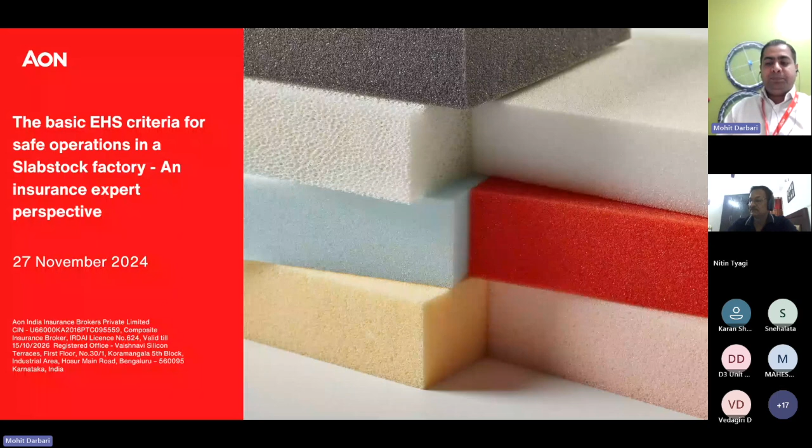So going to the next slide. The agenda of today's webinar would be about the introduction to the foam industry, then the risk analysis point of view, risk management, insurance perspective, and how you can transfer your risk to an insurance company. So the agenda would be briefly divided into 3 or 4 categories.

I would like to explain. First, we will be talking about the importance of risk assessment in the factory for hazard identification and risk mitigation. The second part is how we can transfer our risk to an insurance company by paying a considerable amount, known as a premium, so that our risk can be insured by an insurance company, and how this particular industry, the foam industry, is different from other industrial units working in your nearby region or areas. So this is the whole agenda today.

We will be only talking about fire insurance today because of the constraint of time. Insurance is a very vast subject, so today we will only be talking about industry insurance, or you can say fire insurance.

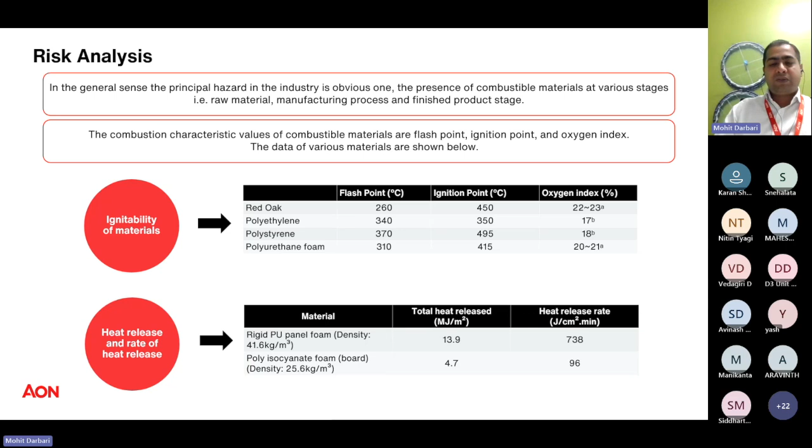Going forward, we have bifurcated the hazard into four categories. The first is storage of raw material, then the manufacturing process, then finished goods and other fire hazards. In any industries where I did inspections, I'm a risk engineer basically, we usually categorize the hazards into four categories, starting from raw material, then process hazards, then finished goods, and other fire hazards. Similarly, I have done it for the PU foam industry.

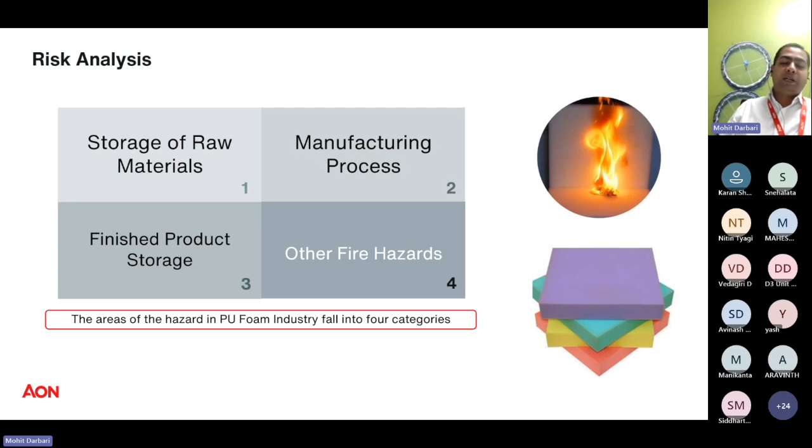And I think the participants who joined the webinar, basically from the mattress industry or seat manufacturers, sometimes use acetone for cleaning purposes, right? Acetone is highly flammable, with a flash point around -20 or -22 degrees Celsius. So these are the types of risks associated with raw material storage in our facility.

Now, the next slide: the specific hazards in the process. When we convert the raw material in the process, as I already discussed, the temperature can rise above 160 or 180 degrees during the foaming process, leading to self-ignition and posing a fire hazard. This is a very critical point in any PUF industry; you have to be very careful about the temperature. When the temperature rises above 160 degrees Celsius, there are more chances of self-ignition, or auto-ignition.

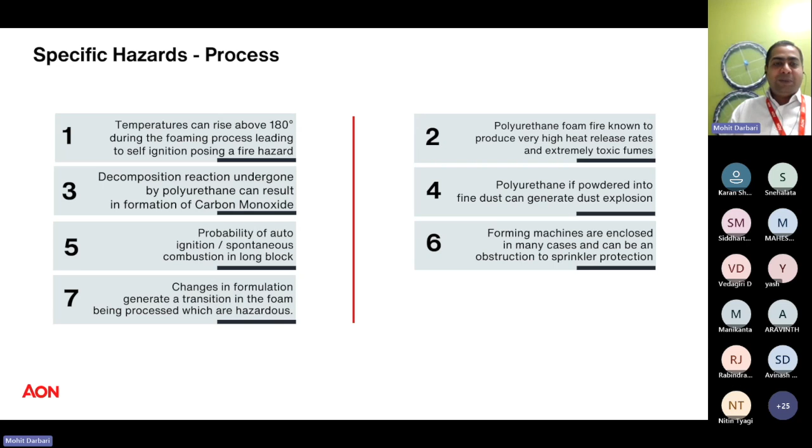Now going into the finished goods. Finished goods are usually in the form of long block, small block, PU foam seat or mattresses, etc. As we already discussed, there is a probability of auto ignition in the long block storage area, which is one of the risks. If we are not checking the temperature at each and every stage, then we may be creating risk. We are not minimizing the risk properly in that situation.

So for risk mitigation, measuring the temperature, especially in the long block storage area, is a critical factor. It is difficult to extinguish the fire if it happens. This is a very, very important point. In some industries, I have seen that if you install fire extinguishers and the fire hydrant system, the manual firefighting system, and a fire happens in those industries, you can use the fire extinguisher and douse the fire by going there.

But in this particular industry, it is very difficult to extinguish the fire because it is very difficult to identify the originating point of the fire at the very initial stage. If you are able to find the originating point, then it is okay. But if you cannot find the originating point after 1 or 2 minutes, from the smoldering side it can go in any direction. Ignition can happen rapidly. So it is difficult to extinguish the fire if it happens.

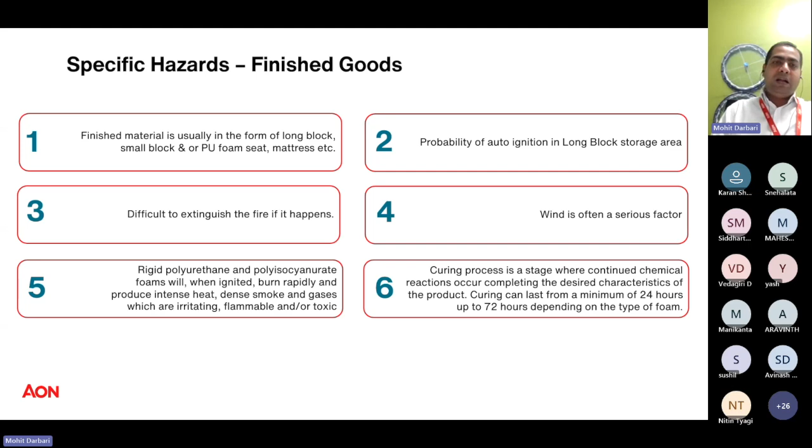have already discussed. So this is basically your commodity's inherent property. So whether it is your finished product, your process fire hazard or your raw material, it is the inherent property of the foam that these types of risks and hazards are present. Now, the next topic is how to mitigate those hazards, how to minimize those hazards. But before that, we will be talking about other hazards also.

Other hazards, in any industry, include unsafe electrical conditions. Especially in the PUF industries, you have to be very careful with your electrical condition. No naked, no bare wiring is allowed in any part of your factory, whether it is a process area, raw material storage area, finished goods area, scrap area, maintenance workshop, admin building, any area. No unsafe electrical condition should be there.

So it is always suggested from our side, from an insurance perspective, that all electrical installations should be industrial type. And wherever you have flammable solvent, flammable or combustible chemical storage, please go ahead with flame-proof electrical fittings. No non-industrial type, no domestic type switch should be allowed.

The second is hot work, cutting and welding. It is an important thing. If any operation needs to be done within the facility, within the production block, it is always suggested that you first isolate the storage area from the area of hot work so that no spark can go to your storage area or production area, which can convert into a fire.

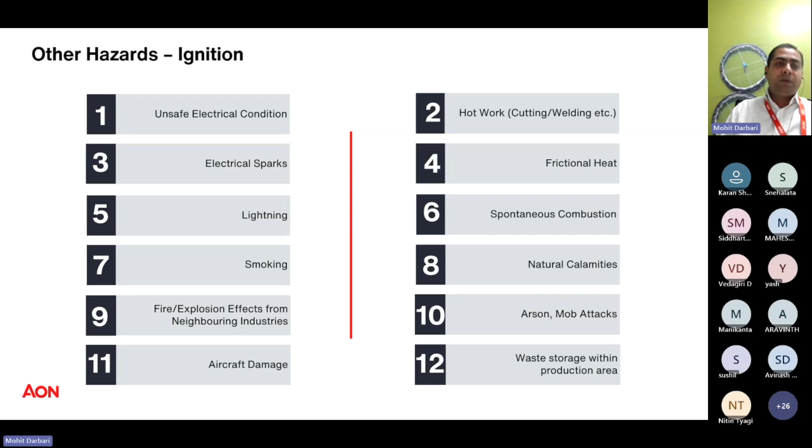So this is all we are talking about the other hazards. Now going to the risk management point of view, how we can control the risk: reduction and loss prevention methods, right? So the first is we can store the polyol and isocyanate in well-contained retention basin areas. So when I say retention basin areas, that means that if you are storing a tank, if you are having a metal tank, it should not be stored directly over the ground. Once you store directly over the ground, maybe some spillage or leakage you could not identify.

And if you have made the tanks or silos, then one dike should be provided so that in case of leakage, if it happens in those main tanks, it would be accumulated in that dike only. That chemical will not spill out from those areas. So these are some of the risk reduction measures pertaining to the storage of polyol and isocyanate.

Offloading of the truck into the tank should be organized in a way to remove any risk of human error. So when we are doing the connection of the pipe from the tanker to our tanks, we should be very careful so that polyol is connected to polyol and isocyanate is connected to isocyanate. And the same would be for the other chemicals also if you are using them in your industry. We should make some SOP for different color coding of the different pipelines for isocyanate and polyol, in the entire factory.

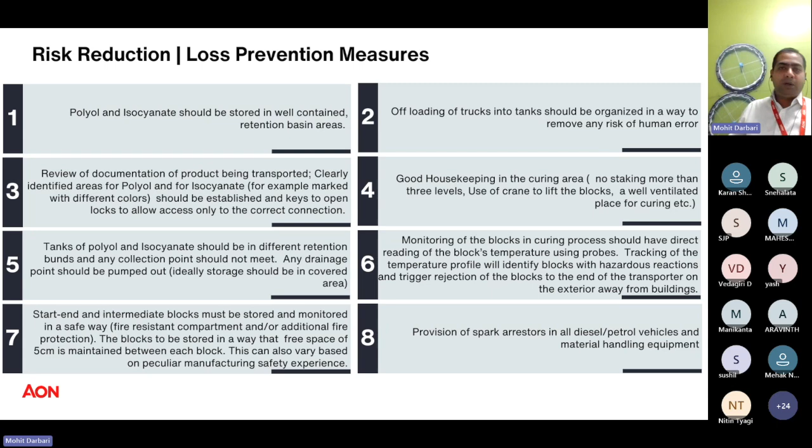So these are some of the risk reduction measures which I'm talking about here. There's a vast list. When we usually visit the factory, some practical things also come up. But these are some of the thumb rules, I would say, which should be applicable to all the foam manufacturers and the allied product industry.

The most important in this is basically the ESFR sprinkler. As we already discussed, manual firefighting in PUF industries is very difficult. So in case a fire happens in this type of factory, using fire extinguishers or the fire hydrant system is extremely challenging for dousing the fire. We have seen in our peer industries also that ESFR, early suppression fast response, sprinklers have great feasibility for dousing the fire. I have one video also that I'll be showing you at the end of the presentation. So that is the reason I have mentioned it here.

It is strongly recommended that all the areas where the foam is stored or handled be protected by the automatic sprinkler system. So what exactly does the sprinkler system give as an advantage to us?

First of all, in case of any fire happening in the facility, the first thing is that all human beings should be accumulated to the emergency assembly point, and you don't need to do any firefighting operation. The sprinkler would allow dousing the fire on its own. There is no manual intervention required.

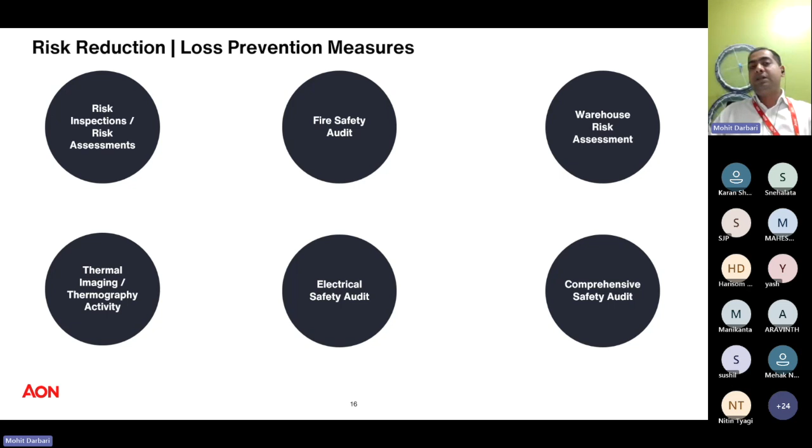Now, going ahead, the insurance perspective: what we understand right now is we identify the risk, we do the risk analysis. In the risk analysis, we find out that our industry is having more hazard as comparison to other industries. We did the risk analysis on the basis of four parts: raw material storage, finished goods, other hazards, and the process hazard.

Then we find out the risk reduction measures also. Now, the other thing we can do, we have done the adequate risk reduction measures and adopted them from our end. Now, still we have the chance to transfer our risk to an insurance company. This works in a similar method. I think everybody who is part of this webinar is aware of how insurance works.

It is easy now. We are all having a bike or car at our home. So we took the insurance by paying a certain amount, known as a premium, and cover the entire car. So if my car or anybody's car meets with an accident or something else, the insurance company compensates the loss. This is how similarly the industrial insurance works.

So what is fire insurance? Insurance is a coverage that protects a policyholder from financial losses arising out of the insured property getting damaged. So if your facility, your factory, is taking fire insurance, and in case any fire happens in your plant, causing damages to your building, and your plant and machinery is stopped, the value of that is basically compensated by the insurance company.

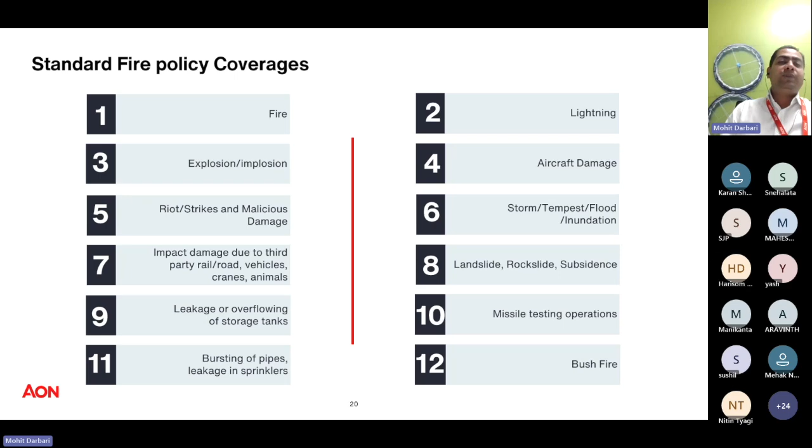So this is how the standard fire policy coverage works.

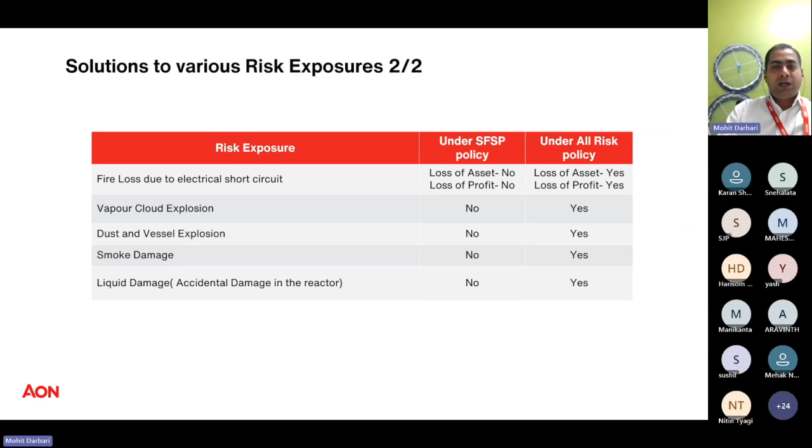Now going next, I think we are not getting time to cover this risk transfer, which is a little bit vast in comparison to SFSP and IAR. Before that, I would like to show you the ESFR video, just a minute. It's very good, and why it is important you can see in this video. Just give me a minute.

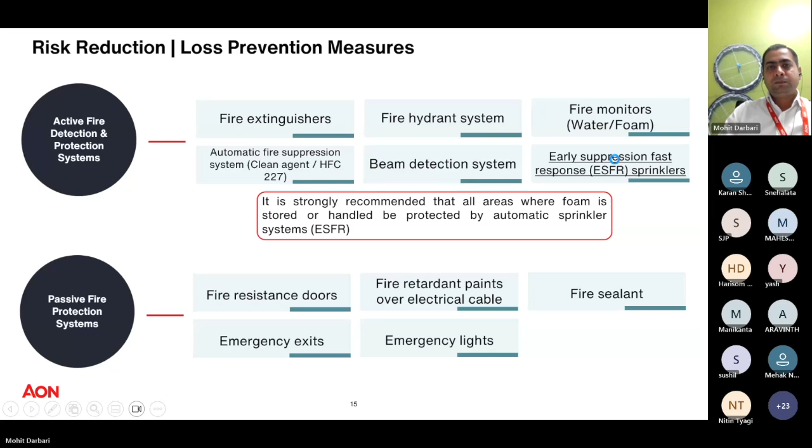Now why is UEP important? Going to the first slide, which we have discussed here, this uncartoned expanded plastic - why is it important as per NFPA? Because commodity-wise sprinkler installation is a different thing.

So if I am installing the sprinkler in my factory, and if I am making a product like plastic crates, then the sprinkler installation would be different. And if I am storing foam, sprinkler installation would be different. If I am storing corrugated boxes, sprinkler installation would be different. So design and installation of the sprinkler basically depend upon the classification of the plastic family group.

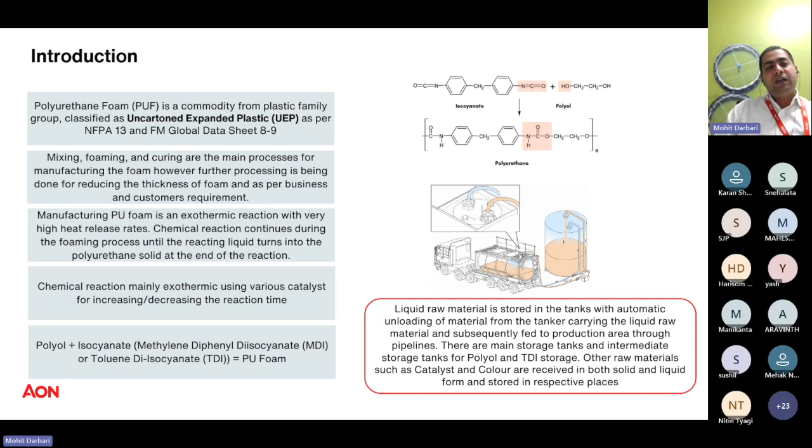So first of all, the important thing is this: when we are talking about a sprinkler specifically, we have to know which category of the plastic family group polyurethane foam falls into. After that only we can go ahead with the installation and recognition of the sprinkler installation. That is the reason it is very useful.

I'm not sure why this video is not running. Let me just try once again.